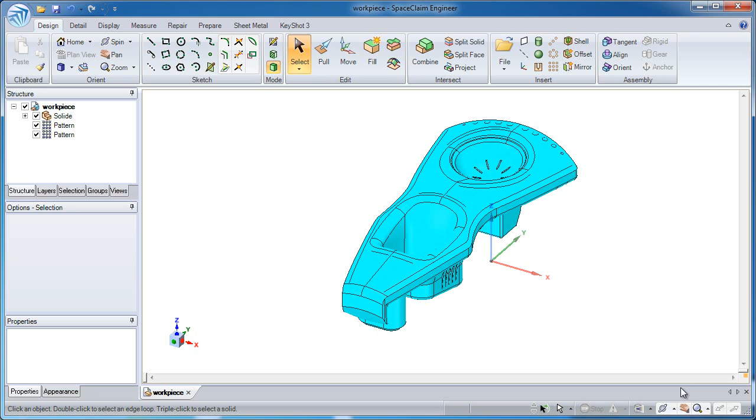Let's take a look at the basics of SpaceClaim, and we'll look at the basics in the context of creating some kind of geometry around an existing workpiece.

Now, if you're in a machine shop and you receive a 3D model, you cannot readily just go change the model. The customer's model needs to stay the same, so that's why in SpaceClaim we let you lock down a model, so any types of changes you try to make afterwards are restricted.

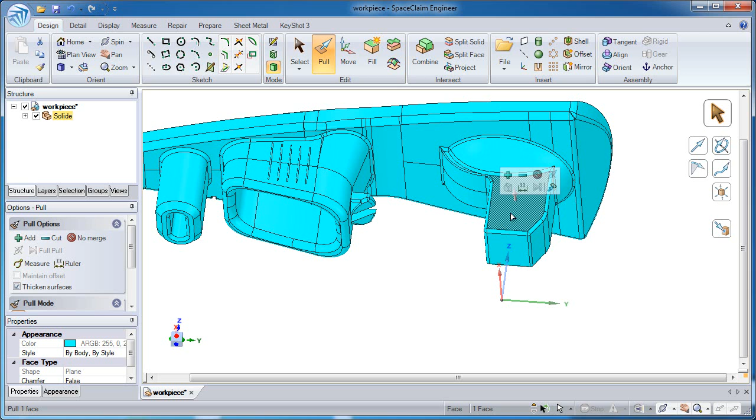So in the way of building some geometry around this workpiece, some kind of a fixture namely, I'll start drawing out a few sketches. Now it's not important to me right away where these sketches are or the exact sizes, but I'm just mapping out some milestone locations and roughing out the sizes.

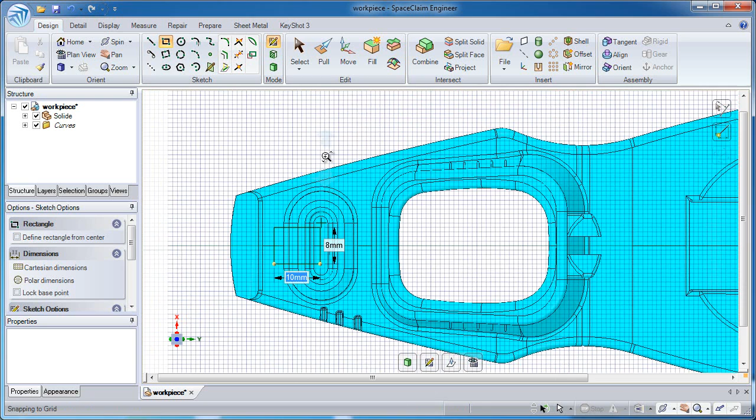I've got maybe a block that will hold this workpiece towards the front and some kind of a cylinder on the back side. And maybe the last sketch I need is to rough out a base on which the block, that rectangular block, and the cylinder will be held in place.

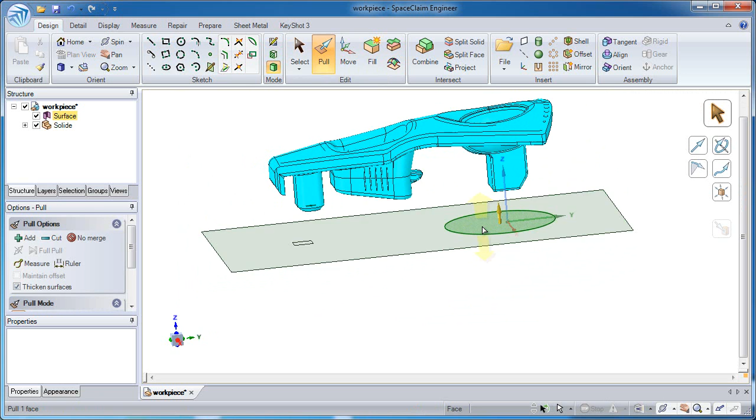Using the first of my major tools called pull, it's easy to take any of those regions that I just created and pull on them, start making some geometry. And you see me doing this in a free-form fashion, meaning I haven't put any dimensions in, whether it was on the sketch or on those two solids I just made.

But at any time in SpaceClaim, I can put precision into movements and changes and the creation of geometry anytime and anywhere that I want.

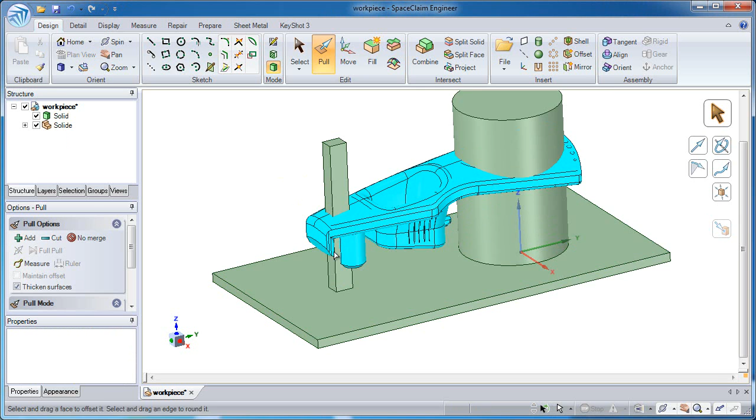And something I love about the software is when I need to add some new features to the model, I don't really have to mess around with sketches anymore if I don't want to. I've got useful geometry all around me with which I could make new regions to play with.

And then when I pull on those, I get extra geometry in the mix. So it's a fast way to create some things in your model on the fly.

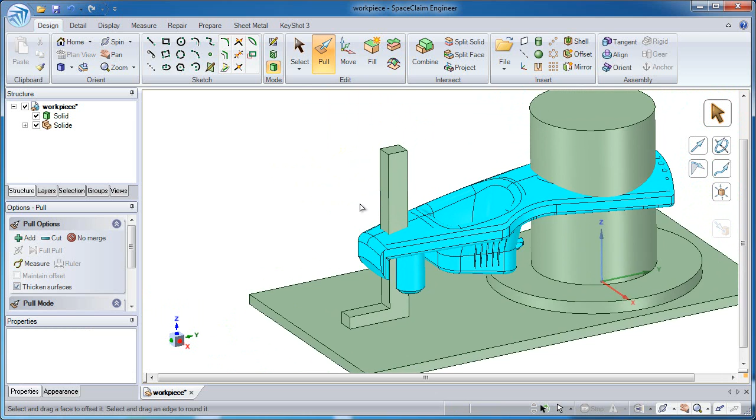One obvious problem I have with this, you're wondering, is how is this going to be a realistic fixture? I've got a major interference between the workpiece and the green bodies.

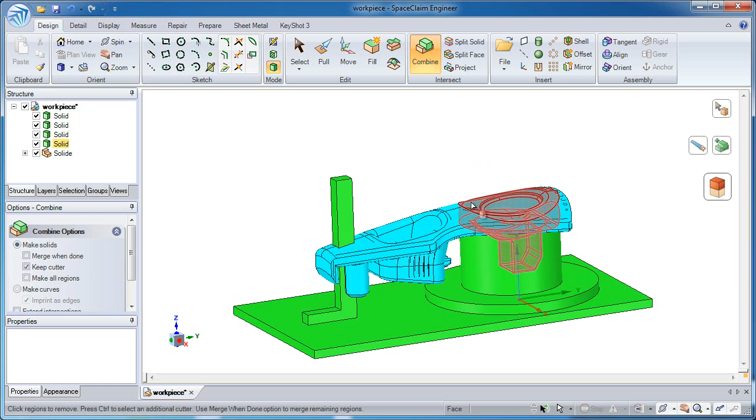Well, using one of my tools called Combine, this lets me chop up models. So I really want to chop up the green model and use the blue one to do it. And so excess areas and areas of interference I can get rid of just with a click of a button.

Now here's the great part. When I hide the blue workpiece, you'll see that its contour has been transferred exactly to the green bodies.

Now there's still a little bit more cleanup and work you may want to do to add that precision you want into the model. Everything in the center of the cylinder you may want to get rid of. It's not necessary to actually mill that out or turn that out.

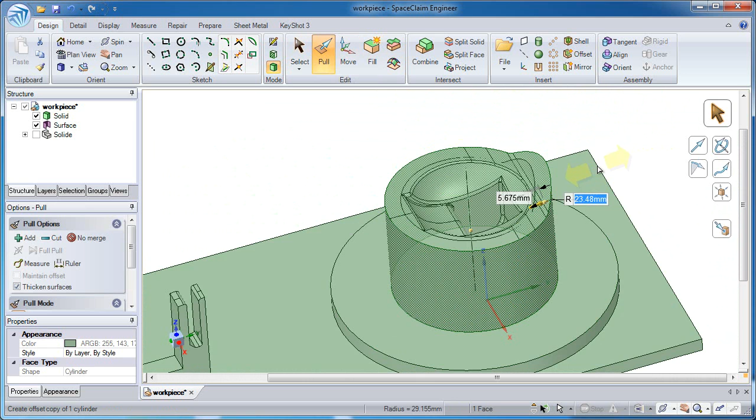So I could just, in a sense, turn the cylinder into some kind of a tube. And I have a tool to let me do that. It's called Split Solid. It lets me chop up a model based on a new surface I just created.

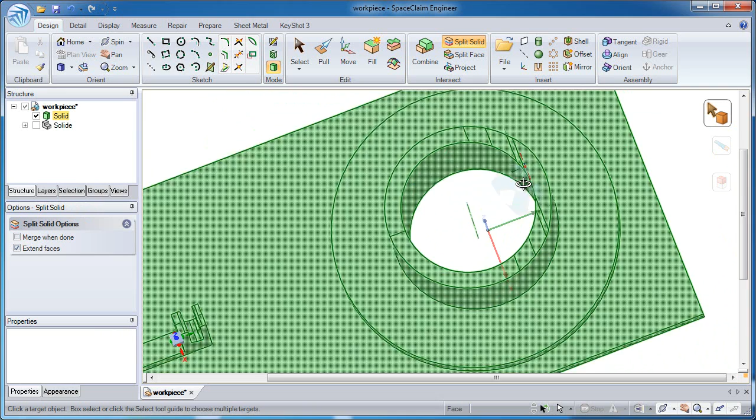And it automatically puts me in a mode of deleting the center of that based on that new surface that cut it up. So I'll get rid of that surface. I don't need it anymore. And this is now a tube, much easier to machine the end of this out.

So you saw me use the pull tool to actually create geometry. It's this fill tool that allows me to delete it, because maybe there's things I just don't want and aren't necessary for holding this in place. I can fill those things in and get rid of the geometry on the fly.

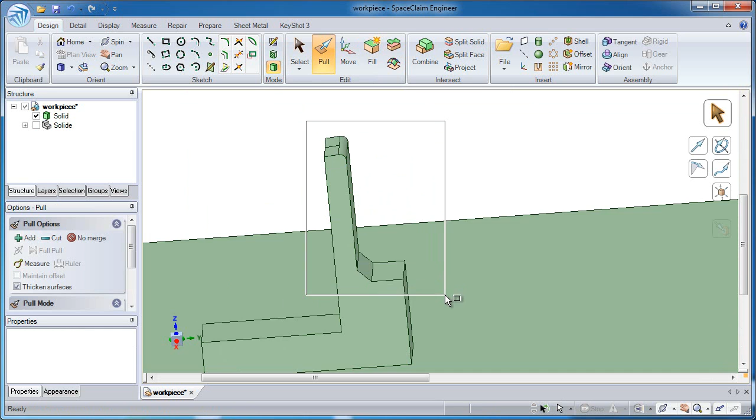Typically, when you have some kind of a fixture, you may want a small offset. You may not want an exact line fit, so with the pull tool, grab faces I want to modify and make them bigger or smaller accordingly. Let's resize this by a small amount, maybe an eighth of a millimeter.

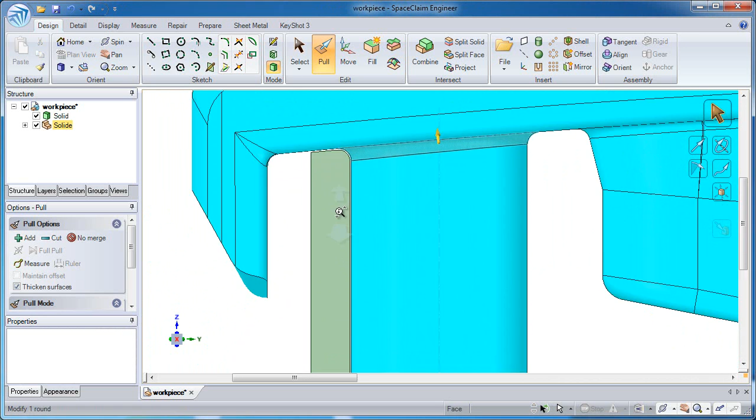So now when I show the workpiece and the fixture, you'll see a slight offset between the two. So you could actually mill to a nominal or mill to just a smaller tolerance below nominal.

Now, from my understanding, with fixturing, you'll probably need some kind of an undercut around here. That kind of fit just won't really work, and it's really not that machinable either. You probably need some rounds so as to mill this out.

I'm actually working in a cross-section mode. It's so easy to visualize the model in a cross-section mode, but the unique thing is wherever your view is in SpaceClaim, we allow you to actually use the main tools, pull, move, fill, combine, in a cross-section mode.

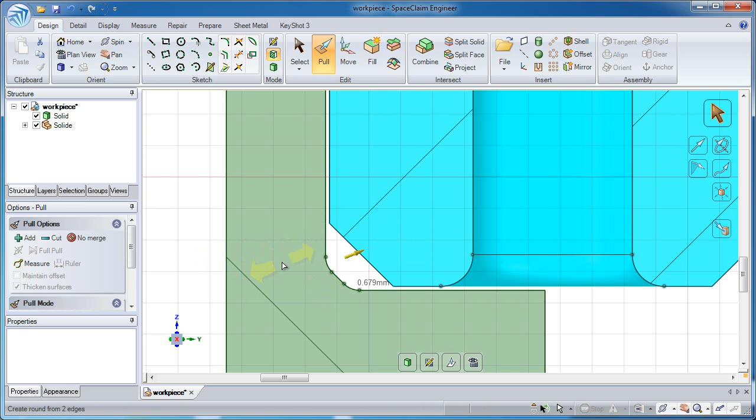So from here, I'll add a couple rounds, size those to whatever you want, whatever your tool is, and you're done. And maybe there's another round on this back edge, and if I want to increase the size of that one, I can do that too, just to make sure there's enough clearance for this part to fit on there and it's not getting stuck on corners.

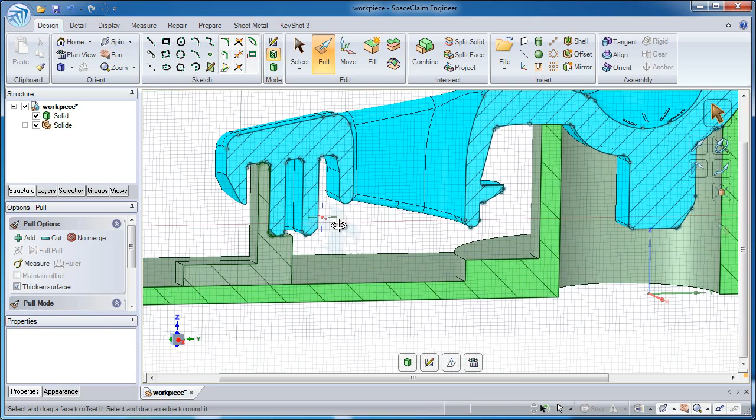So there you have it. In just a few minutes, I can rough out the shape of a fixture and actually put the precision in where I want to and however I need to, using the simple tools in SpaceClaim.